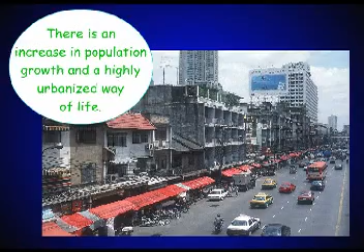We are currently facing several threats in our society: an increase in population growth and a highly urbanized way of life, a lack of waste disposal facilities, dump sites, and landfills, water contamination and the possibility of an outbreak of disease, and more pollution in the air and water because of the garbage.

Several solutions are available to remedy the given problem, one of which is the strict implementation of the Republic Act 9003, otherwise known as the Ecological Solid Waste Management Act of 2000.

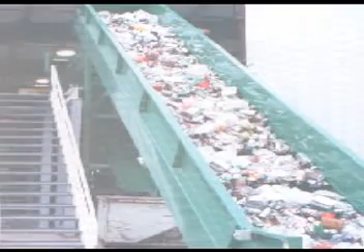Educating people on the proper disposal of home waste through public information, and for local government units, putting up material recovery facilities or MRFs would be very helpful.

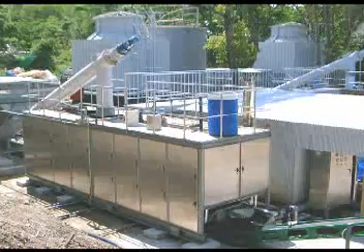Lastly, the installation of environmental recycling system machines in these material recovery facilities or dump site locations will be beneficial in solving our waste problems.

The environmental recycling system is a machine that uses a low-pressure drying fermentation system that combines organic waste with local indigenous microorganisms and converts these wastes into fertilizers or animal feeds through a vacuum process with temperatures at an average of 60 degrees, where the microorganism is most active.

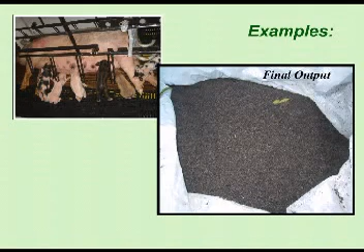The environmental recycling system can treat almost all types of organic wastes: leftover food and waste from homes, restaurants, and hotels, carcass of pigs, chicken, rotten eggs, as well as animal dung from piggery, poultries, and ranches, pig blood and slaughterhouse waste.

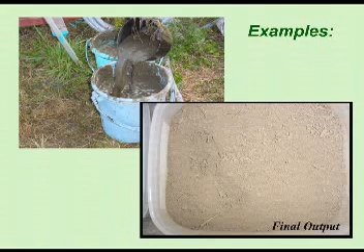Expired juice, tea, and milk waste, fish waste, and sludges from lakes and marshes, as well as sewage and septage sludge.

ERS can practically process everything except for bones from pigs and cows, bottles, plastic, and tins, which will remain in the holding tank.

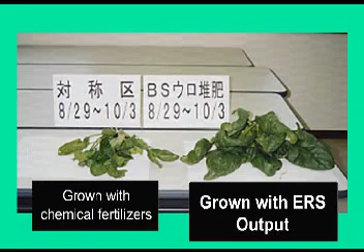The output of the ERS, when used as fertilizers, have produced better results in agricultural products.

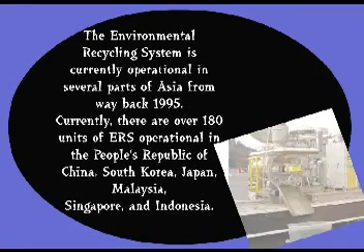The environmental recycling system is currently operational in several parts of Asia from way back 1995. Currently, there are over 180 units of the ERS operational in the People's Republic of China, South Korea, Japan, Malaysia, Singapore, and Indonesia.

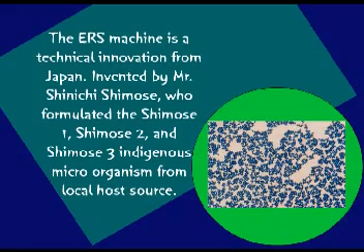The environmental recycling system machine is a technical innovation from Japan, invented by Mr. Shinichi Shimose, who formulated the Shimose 1, Shimose 2, and Shimose 3 indigenous microorganisms from local host source.

The process begins with the collection of organic garbage. These are brought to the ERS plant, where it is sorted and checked for non-biodegradable materials. The contents are then combined with local microorganisms and poured into the machine.

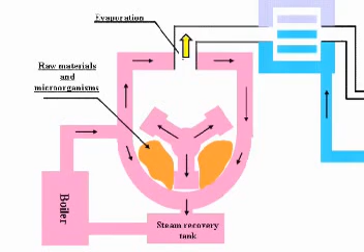Boiler steam will heat contents in the main body while the rotator rotates the waste materials. Raw materials will be treated and water will be evaporated and sucked by the vacuum pump, eliminating all toxic water from the garbage. This water will be sent to the cooling tower to be cooled.

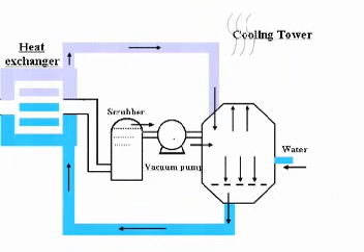The heat exchanger will draw cool water from the cooling tower to reduce the temperature of the saturated vapor. The saturated vapor is converted into cool water in the heat exchanger and flows into the scrubber where dust and water will be separated.

The output is then filtered to remove inconsistencies, and the resulting product may now be used.

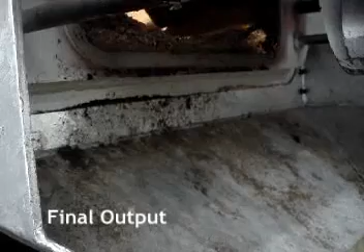The raw organic compost fertilizers are odorless with a moisture of 9.3%, which is dry, and are produced within 2 to 3 hours only.

The environmental recycling system is powered by bunker fuel for its boiler and 220 volts electric current for the motors and control panel gadgets, as well as the conveyor.

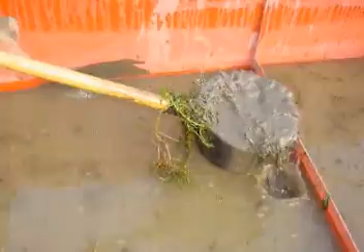The environmental recycling system is utilized in disposing waste materials in various industries such as piggeries, poultry, cattle ranch, slaughterhouses, frozen food processing plants, sugar mills, distilleries, lakes, marshes, and water dams, household, restaurant and hotel waste, and food and beverage factories.

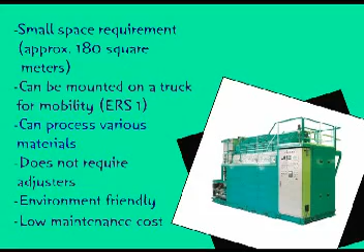The environmental recycling system features a small space requirement of about 180 square meters. For the ERS-1, it can be mounted on a truck for mobility. It can process various materials. It does not require adjusters. It is environment friendly and has a low maintenance cost.

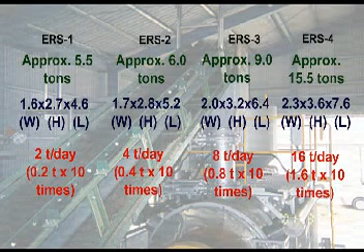The ERS comes in 4 different size capacities. The maintenance cost of the ERS varies on the application.

The environmental recycling system is acknowledged by the Korean Natural Farming Association for South Korea, People's Republic of China, and Mongolia, the Japan Agriculture Association of Kagoshima, Japan, the Nanyang Technological University of Singapore, the Asian Productivity Organization, and the National Solid Waste Management Commission of the Republic of the Philippines.

The ERS is also qualified for the Clean Development Mechanism as agreed by the Kyoto Protocol, which can then be exchanged for carbon credits.

Analysis from the Department of Science and Technology shows that the output of the environmental recycling system is bacteria-free.

The ERS is distributed by Shimizu & Company Limited of Nagasaki, Japan for the Philippines, with Protec Machineries doing maintenance work for the ERS.